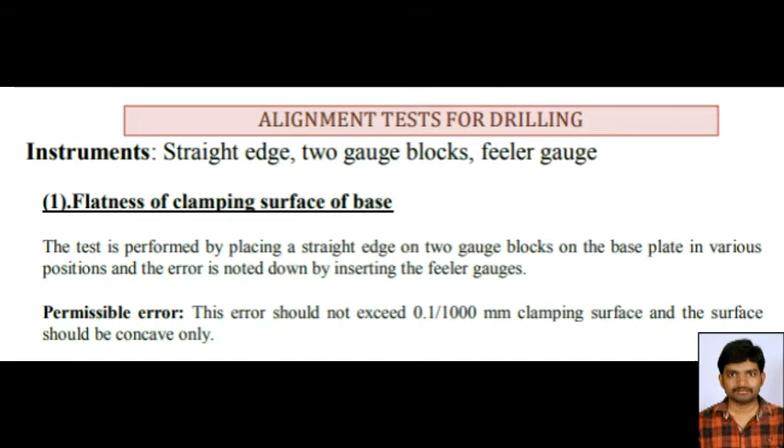Now coming to the second test, it is flatness of clamping surface of table. Flatness of clamping surface of table. This test is performed in the same manner as we discussed earlier in test 1, but on the table. The permissible error is also the same as in test 1.

Now move on to the third test. It is perpendicularity of drill guide to the table and base plate. For this test we have to take the instrument frame level. The squareness, the perpendicularity of drill head guide to the table, is tested in this test.

The test is done in two positions: in a vertical plane passing through the axis of both the spindle and the column, and the next one in the plane at 90 degrees to the plane at position A. This is performed by placing the frame level on guide column and table.

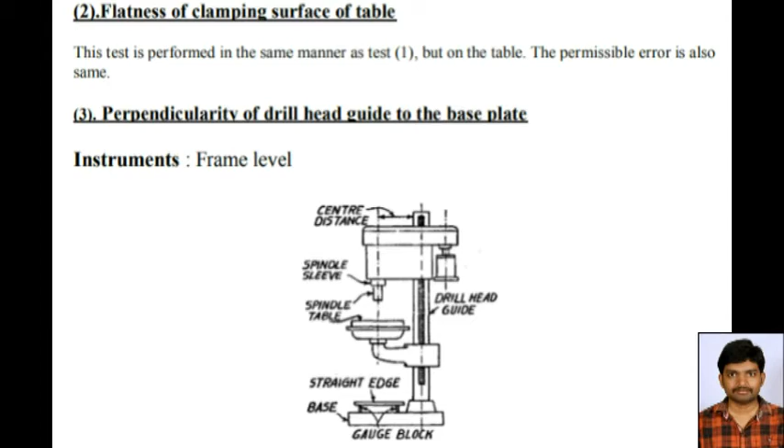For testing the perpendicularity of drill guide to the base plate, the test is similar as above. The only difference being that the frame level is to be placed on the base instead of the table. The frame level is placed on the base instead of the table.

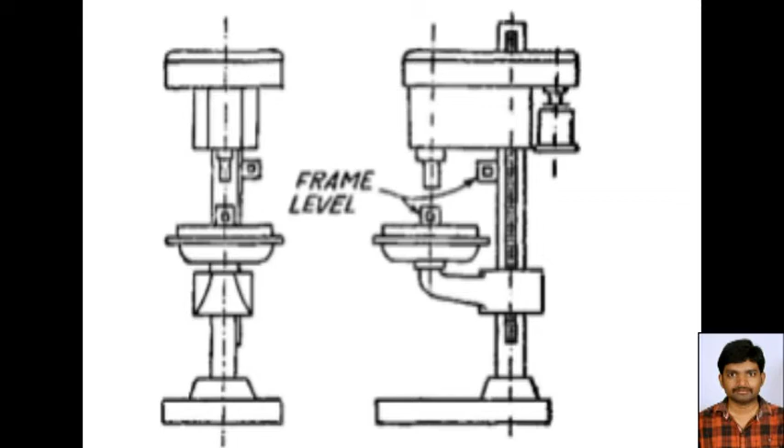And the fourth step is perpendicularity of spindle sleeve with the base plate. This test is performed in both the planes as specified in test 3, in a similar manner. The only difference is that the frame levels are to be placed on the spindle sleeve and base plate.

The permissible error should not exceed 0.25 mm for plane A, and the sleeve should be inclined towards the column only, and 0.15 mm for plane B. So this is the fourth test, perpendicularity of spindle sleeve with the base plate. Now let's move on to the next step.

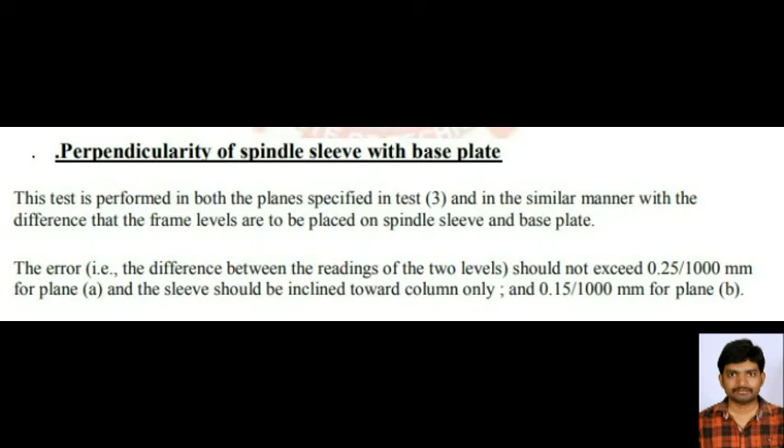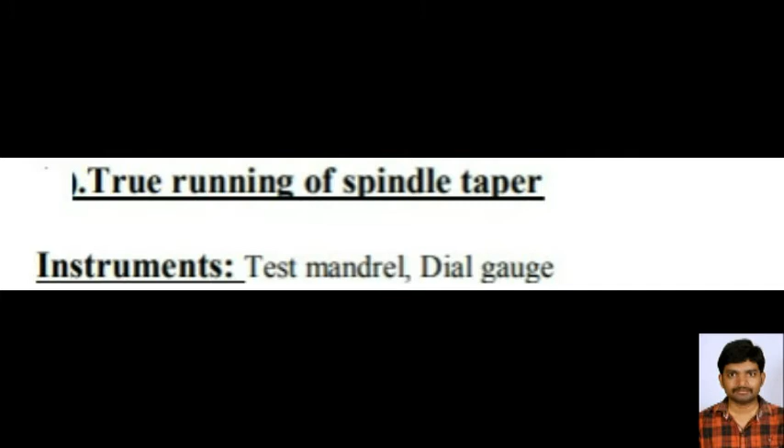The next step is true running of spindle taper. The instruments used in this test are a test mandrel and dial gauge. The procedure is: the test mandrel is placed in the tapered hole of the spindle, a dial indicator is fixed on the table, and its feeler is made to scan the mandrel. The spindle is rotated slowly and the readings of the indicator are noted down.

The permissible error should not exceed 0.03 mm per 100 mm for machines with taper up to Morse number 2, and 0.04 mm per 300 mm for machines with taper larger than Morse 2. So this is the true running of spindle taper. Let's move on to the next step.

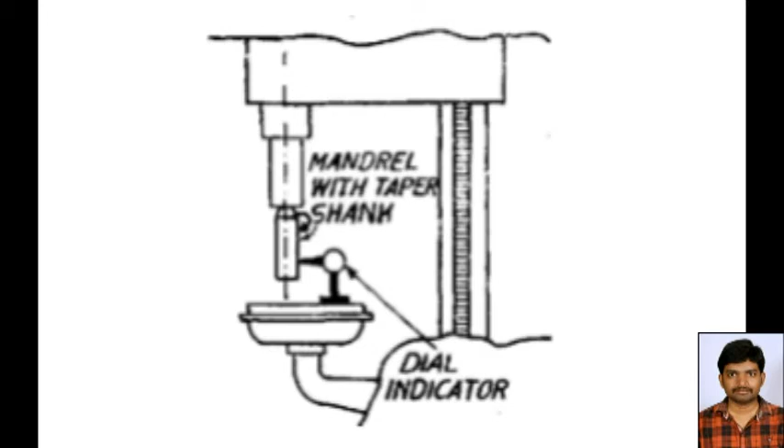The sixth step is parallelism of the spindle axis with its vertical movement, and the instruments used are a test mandrel and dial gauge. This test is performed in two planes, A and B, at right angles to each other. The test mandrel is fixed into the taper hole of the spindle, and the dial gauge is fixed on the table with its feeler touching the mandrel.

The spindle is adjusted in the middle position of its travel, and then moved up and down from the middle position with the slow vertical feed mechanism, and the readings of the dial indicator are noted. The permissible errors for planes A and B are 0.03 mm and 0.05 mm. So this is the parallelism of spindle axis with its vertical movement.

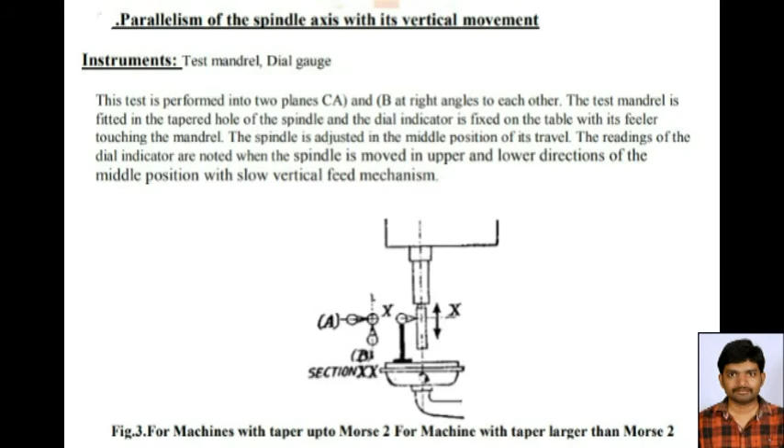Coming to the next test, the seventh one, squareness of clamping surface of table to its axis. The instrument used is a dial gauge. The dial gauge is mounted in the tapered hole of the spindle, its feeler is made to touch the surface of the table, then the table is moved slowly and the readings of the dial indicator are noted down. The permissible error should not exceed 0.05 mm with 300 mm diameter.

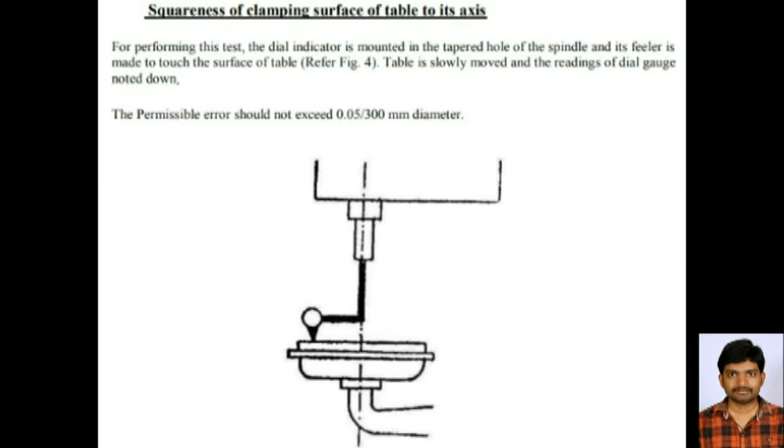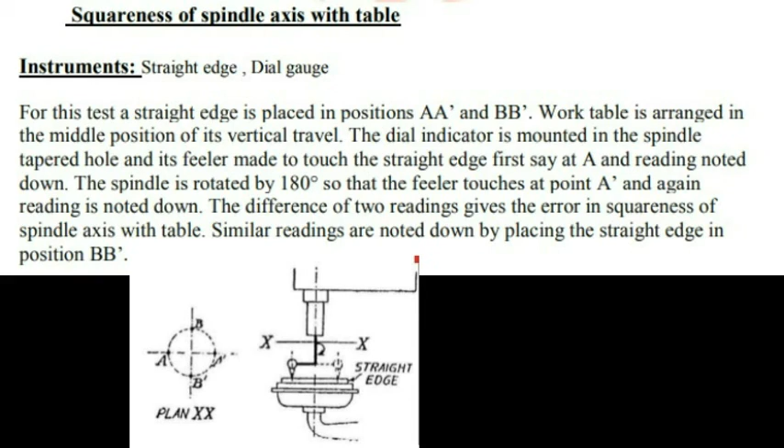The permissible errors are 0.08 mm per 300 mm, with the lower end of the spindle inclined towards the column only, for setup A dash, and for B dash it is 0.05 mm. So these are the various alignment tests which are performed on the drilling machine.

I hope everyone understands this lecture. Please read well. The diagrams are simple, so the concept is important, and learn the side headings, that means the steps, by heart. It is a very important unit. With this we have completed the alignment tests unit.